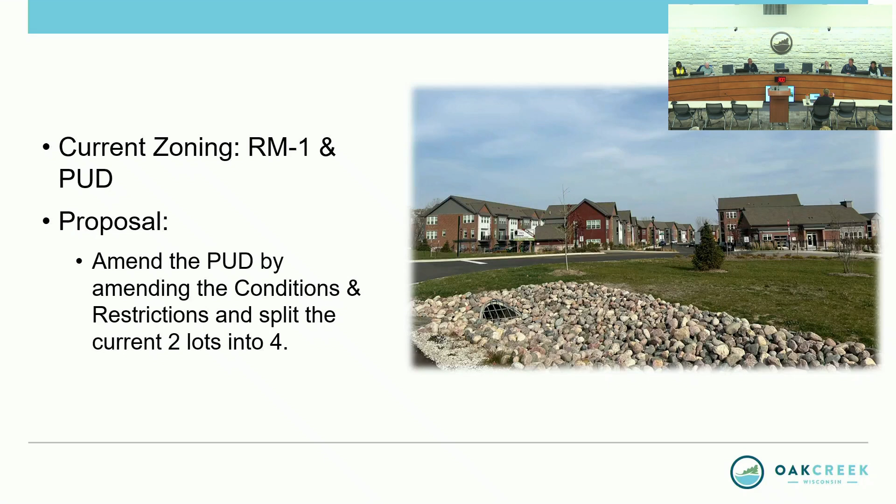What is being requested is, due to financial reasons, the lender is requesting to split the existing parcels at Oaks at 8100. This is how the land was approved to be split when the planned unit development was originally approved in 2021. There are two parcels split by Orchard Way - the parcel on the west highlighted in red, and the parcel on the east highlighted in blue. Lots 1 and 2 were created by CSM number 9404.

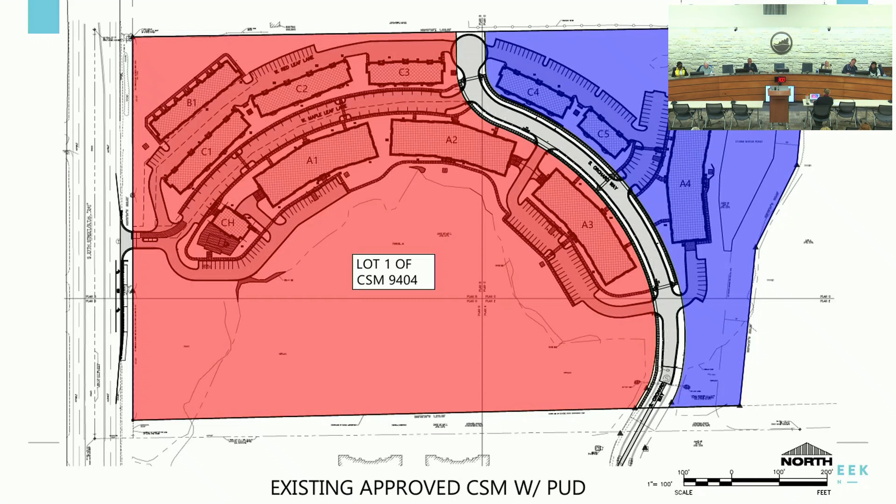The scope of the project is not changing at all. The project is continuing with construction of all the buildings on the site plan. Only two are not completed - A3 has not yet started, they're finishing up A2 right now, and A4 is yet to be constructed. But there's definitely progress on this development, one building at a time.

The proposal is to split what was red into the red and yellow, and what was blue into the blue and green. The request for the planned unit development is simply for one setback number that can't be met due to the lot split, which is circled in red. So the request is to amend the conditions and restrictions with this one number.

That number used to be 5 - it required a 5-foot side yard setback for off-street parking. But the blue and green are proposed to be split right down the middle of one particular parking lot, so that 5-foot setback can't be met because it would become a 0-foot side yard setback in a parking lot. Other than that, nothing's changing except literally this one number.

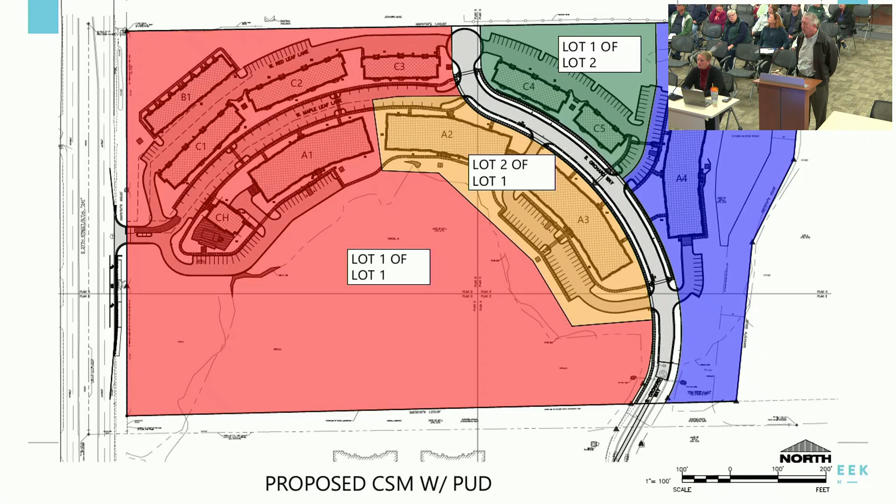You can see the picture here at the bottom, already paved. This is that parking lot where the invisible lot line will go, splitting green on the left and blue on the right. So that parking lot is already paved then. Yeah, it's already there. It's just that building A4 is not built yet.

It's an odd circumstance. And I think that given the reasoning for it, I think that it is not necessarily concerning because it will not impact any other developments nearby, or landscaping buffers or anything like that.

Did the fire department have any problems with that? They did not. That's why they're not here in attendance tonight. They had zero comments on all projects.

Thank you. Thank you. No questions. Questions down there?

I have a question, actually. I'm not sure if it's to you or Christie. Have you ever considered having it on an angle? Maybe that will provide some sort of distance more than zero, if you have it on a 45-degree angle, those parking spots.

We retained Excel Engineering to tackle this project for us, and they worked with staff, and this is what they came up with. I'm just the developer, I'm not a technical person. So I went to the experts and the authorities and asked them to come up with a solution, and this is what they came up with.

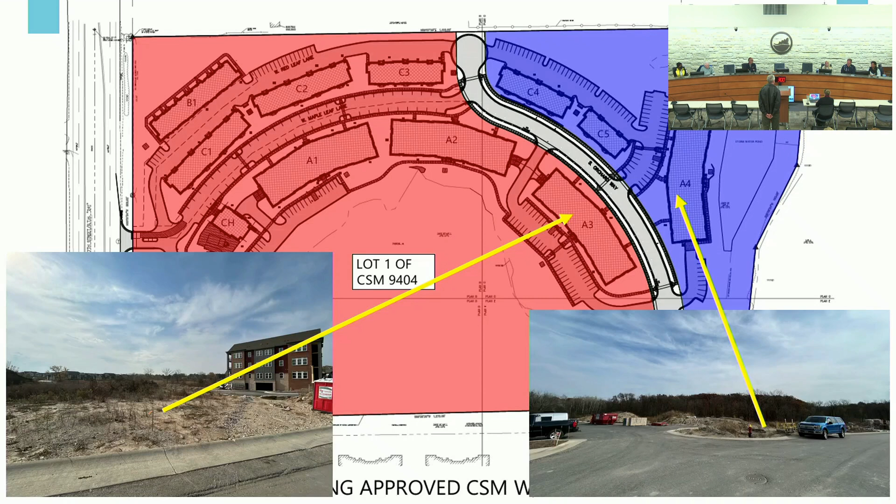And the ownership is the same on all 4 parcels. No questions, thank you. I do have another question. So what if the ownership does change for those 2, and how is that handled? They would just enter into cross-access easement agreements, which would have been the same situation with Lot 1 and Lot 2. Thank you.

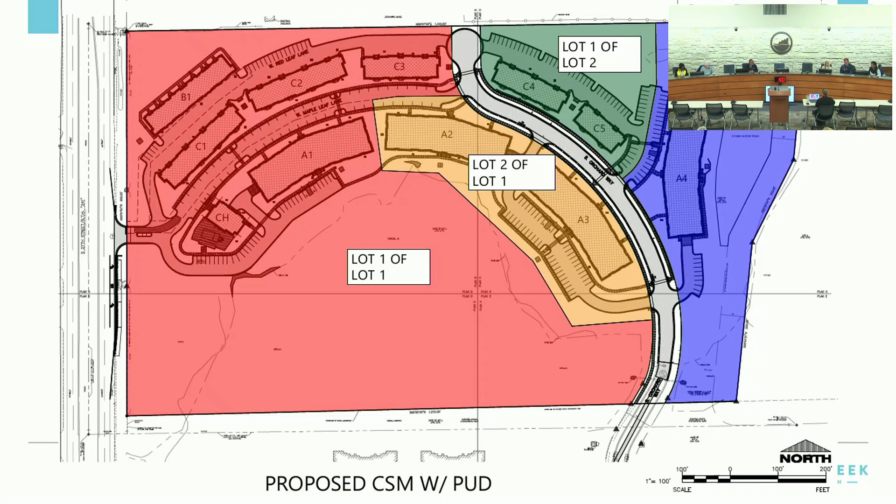Motion? Yeah, motion then, please. Okay. Other question? Someone have a question?

Seifert moves that the Plan Commission recommends to the Common Council that the amended planned unit development and conditions and restrictions affecting the properties at 2676 West Red Oak Lane, 2637, 2668, 2616, 2617, 2548, and 2521 West Maple Leaf Lane, and 8126, 8140, 8159, and 8142 South Orchard Way be approved.

Hannah seconds. Roll call. Hannah, aye. Bouch, aye. Chinsky, aye. Guzekowski, aye. Seifert, aye. Chandler, aye.

Alrighty, thank you, everyone. Go on to 4B, the certified survey map. Review certified survey map submitted by David Decker, Decker Properties, and Devin Winter, Excel Engineering, to divide the Oaks at 8100 multifamily development property located at 2676 West Red Oak Lane.

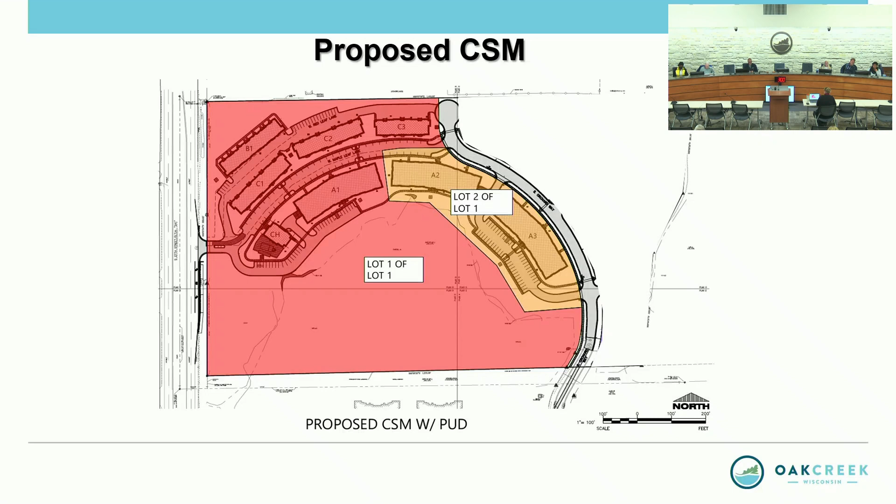Thank you, Alderperson Guzekowski. So this item before you is the actual splitting of Lot 1 as it is today into two parcels, which would become Lot 1 and Lot 2. Both parcels meet the zoning code requirements for size, and this item would go before the Common Council at that same second December meeting.

Pretty straightforward on this one. Questions or comments? No questions, thank you. Questions? Comments down there? No questions. Then we need a motion.

Christine moved that the Plan Commission recommends to the Common Council that the certified survey map submitted by David Decker, Decker Properties, Inc., and David Winter Excel Engineering, Inc., to divide the Oaks at 8100 multifamily development property located at 2676 West Red Oak Lane, 2637, 2668, 2616, 2617, 2548, and 2521 West Maple Leaf Lane, and 8159 South Orchard Way be approved with the following condition: one, that all technical corrections, including but not limited to spelling errors, minor coordinate geometry corrections, and corrections required for compliance with the municipal code and Wisconsin statutes are made prior to recording.

Seifert seconds. Roll call, beginning with Bouch, Steve. Bouch, aye. Kipchinsky, aye. Guzekowski, aye. Seifert, aye. Chandler, aye. Hannah, aye.

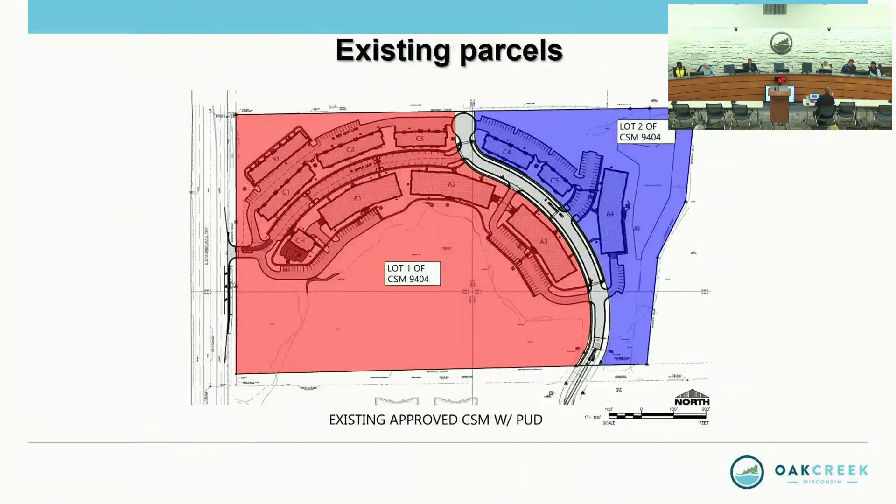Alrighty, C, certified survey map. Review a certified survey map for parcels at Oaks at 8100. Thank you, Alderperson Guzekowski. This item is regarding the eastern lot, which is Lot 2 of CSM number 9404.

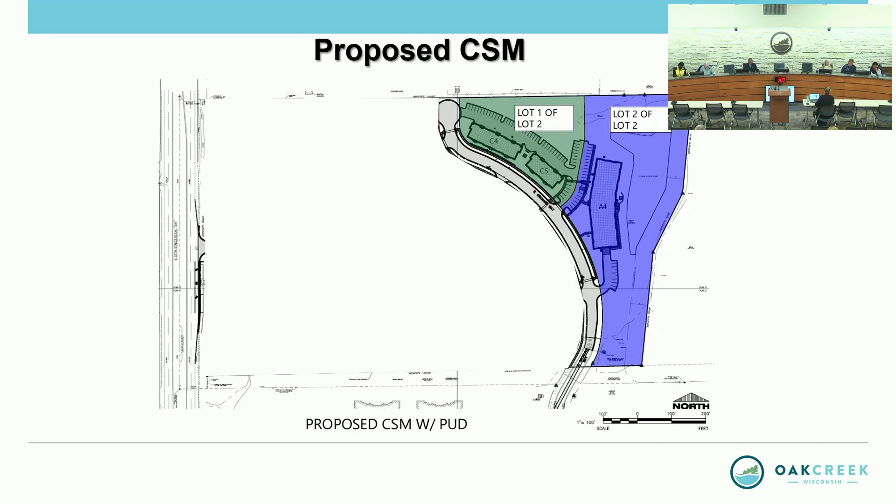The proposal is to split that into Lot 1 and Lot 2. Again, the size of the parcels meets the minimum standards of the PUD and the RM1 zoning district. Staff recommends that the Plan Commission recommend approval to the Common Council. Like this cleans everything up. Comments or questions, anyone? No questions, thank you. No questions.

Then motion, beginning with Ashley. Seifert moves that the Plan Commission recommends to the Common Council that the certified survey map submitted by David Decker Properties Incorporated and Divine Winter Excel Engineering Incorporated to divide the Oaks at 8100 multifamily development property located at 8126, 8140, and 8142 South Orchard Way be approved with the following condition: one, that all technical corrections, including but not limited to spelling errors, minor coordinate geometry corrections, and the corrections required for compliance with the municipal code and Wisconsin statute are made prior to recording.

Hannah seconds. Kipchinsky, aye. Guzekowski, aye. Seifert, aye. Chandler, aye. Hannah, aye. Bouch, aye. Okay.

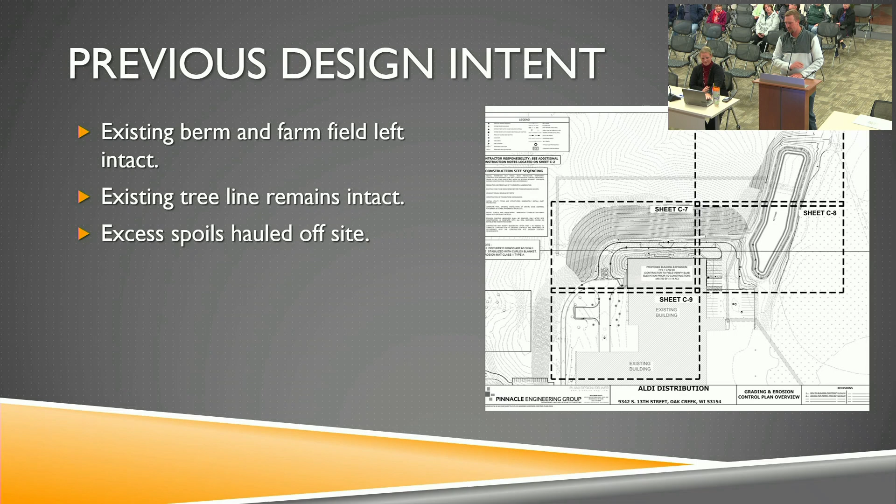Next slide. As Richard said, there's about 100,000 yards of dirt that remains on site, and our user decided to stop taking material. So now we're trying to find a home for that.

Instead of it being an eyesore of a big hill or pile, we're going to shape it into a nice berm that'll be aesthetically pleasing and shade the neighbors, providing a larger line-of-sight disruption. There's a swale proposed along the north property line, and that existing tree line also remains intact.

So with that, I think that's it. Have any questions? I'd be happy to answer those.

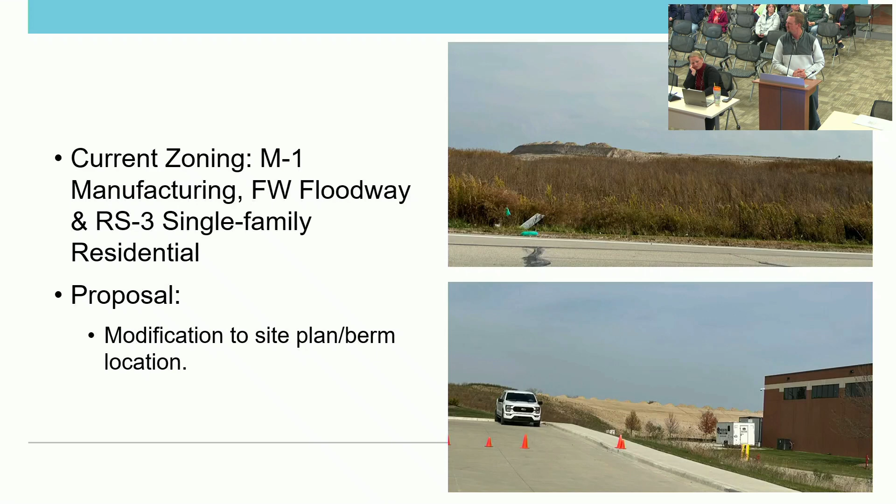I pass by 13th Street a lot and I see a construction entrance site. Is this part of the construction area? Yeah, I believe there's one or two access points off of 13th. It's just for the haul road. Yes, that's all that's out there. It's just temporary, not permanent.

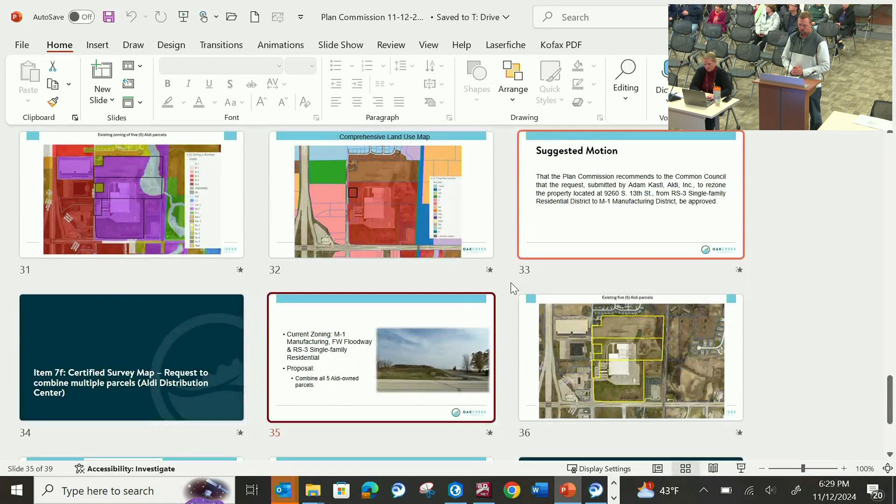Can you go back to the... I think that's the entrance you're used to seeing there, the construction entrance off of 13th. The other one is more on a hill, just across from McDonald's. But anyway, is there a driveway off of Ryan, or do I misunderstand? Or is this off of 13th? Is this where the truck is coming off from, the Access Drive?

There are no new driveways. As part of the previously approved plans, I believe we modified the entry on 13th, and we had a traffic study to back that up, but we're not proposing any new entries with this approval. If you go back - the Access Drive here, where is it going? That's what I call the ring road that goes around the facility itself. Okay, that's it, thank you.

Have you talked to the neighbors north of you about what you plan on doing, just so they're aware of what's going on? They were invited. I know they're here, but they've been kept informed along the way in the process. What happened earlier on in this process, in the build process, is the city never notified the neighbors of the project, so I had to get involved in the middle of summer when it started. So now the neighbors are definitely up to speed.

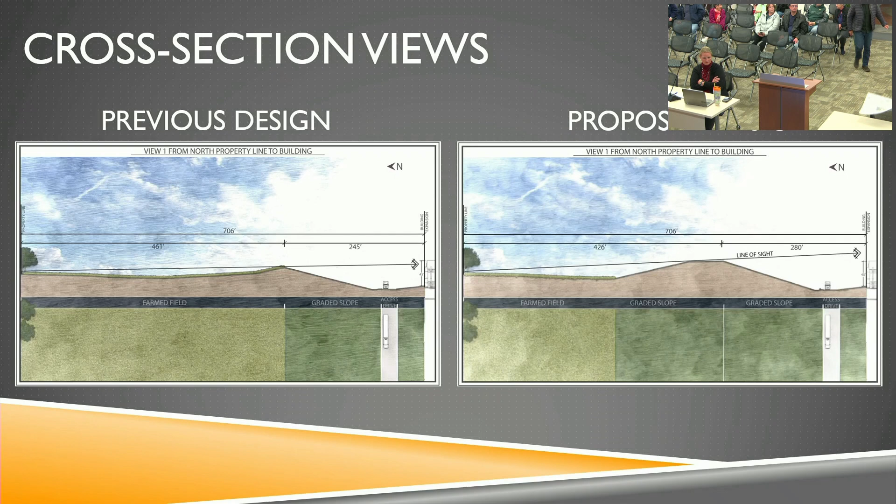My name is Jeff Bloom at 1117 West York Street. My question is regarding the dirt that was initially moved right along the north property line. I don't hear anything about what is going to be done with that now. The existing berm, adding more dirt on top, making that bigger - that's fine. But are they going to move the dirt that they dumped on the north property before anybody knew what was going on? Is that going to be removed? Is there going to be any further work done on that?

Yeah, so the pile of dirt he's referring to is the stockpiled topsoil that we had to strip from the site before we could start reshaping the hill. So we stripped all the topsoil, and that's where we stockpiled it. I think that's what caused a lot of these issues - we probably should have stockpiled it somewhere else. But yes, that stockpiled topsoil will eventually be respread back across the rest of the site, and it will not be there at the end of the project. Any other questions out there?

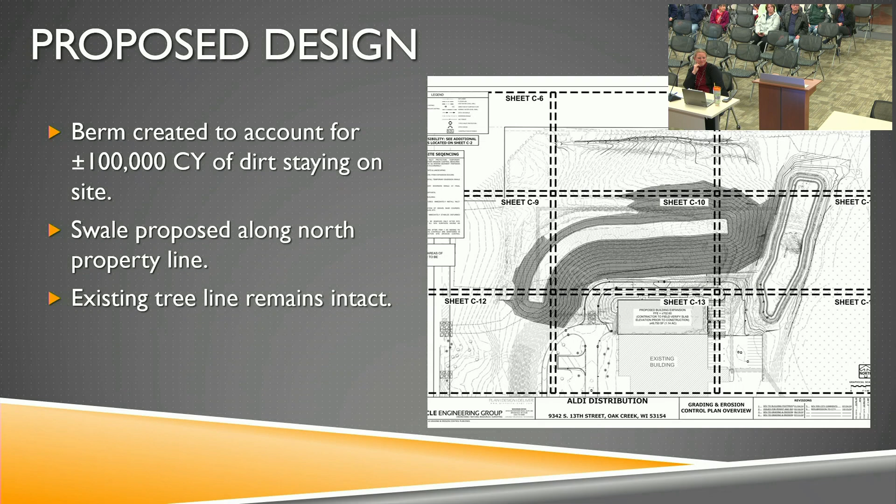Okay. What does everyone think here of the proposed changes?

I have no questions. No more. I do have a question though: will this be permanent, or is this temporary until you find a new customer to remove all this dirt? The new site plan that we submitted would be permanent. Oh, it'll be permanent, okay. And I do have another question for the city: is there a requirement on berm height, a maximum it should be, especially with residents in close proximity?

No, there's not. I mean, if anything, I do believe the residents would be benefiting from this because they don't have to see a warehouse. They'll see the landscaping instead. Yeah, that's the whole point, the reason for the redo and making the berm a little more robust and beefier. This will definitely benefit the neighbors.

And so if it's bigger, that means more water goes towards the residents. But you have this drainage swale now that would catch a lot of this and it will drain into the pond, so it wouldn't make it to the residents. You are correct, we do have the drainage swale, but I do want to correct one thing.

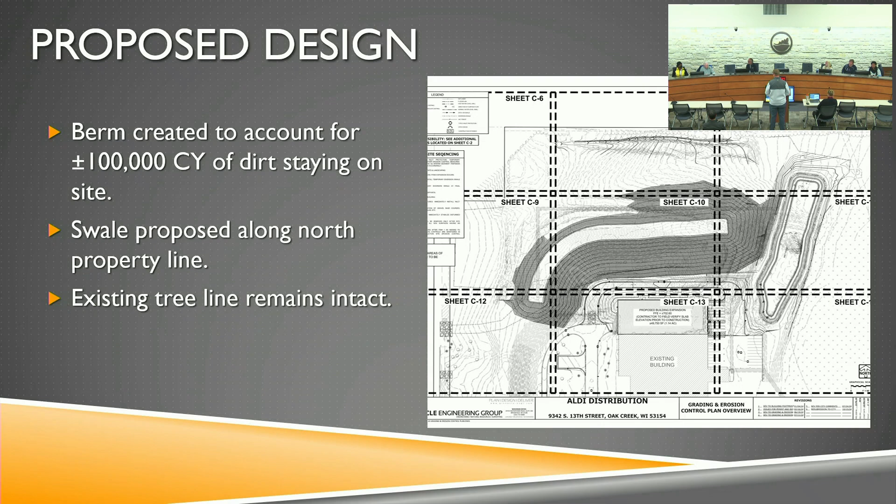More questions? Okay, no questions. Then motion, starting with Fred. Christine moved that the Plan Commission approves the site plan submitted by Adam Kastl, Aldi Inc., and Richard Saki, AM King, for proposed modifications to the Aldi distribution property located at 9342 South 13th Street. Alter second.

Roll call: Guzekowski, aye. Seifert, aye. Chandler, aye. Hannah, aye. Balch, aye. Pshinsky, aye.

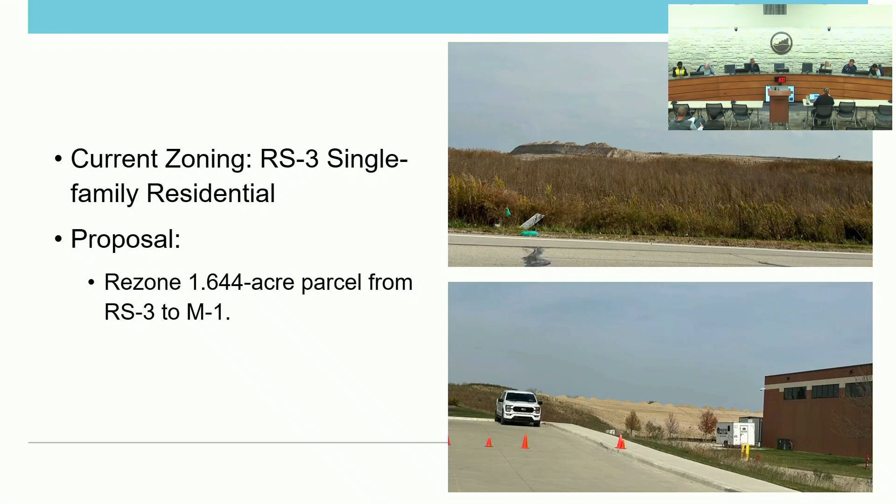Alright, before you we have a request for a site rezone. Rezone request for the property located at 9260 South 13th Street. Thank you, Alderperson Guzekowski. This is simply a cleanup item. There's one parcel that Aldi owns out of their complex of 5 parcels. It's about 1.5 acres in size, and the proposal is to rezone it from single family to manufacturing.

So this is the zoning map. The purple identifies manufacturing, and the blue you can see going through the site is floodway. The 5 parcels that Aldi owns are highlighted in the black boundary, and then there's this one standalone parcel that Aldi purchased in the 90s, and it just was never rezoned. There's actually a pond here today; it's part of their complex.

The next item is to combine these 5 parcels. If you were to combine the 5, you would end up with a split zoned parcel, one parcel zoned manufacturing and single family, which is very poor planning practice. So this is simply an after-the-fact cleanup that should have been done honestly 30 years ago. With that, a public hearing would be held at the second council meeting in December.

Plan commission staff recommends the plan commission recommend common council approval. And it does meet the comprehensive land use map, as this whole complex is identified as manufacturing industrial. So no need to amend the comp plan, just rezone one parcel.

Okay, thank you. Any comments or questions? So is it both green spaces that are being rezoned, or just the one? Let me ask differently: are both green spaces owned by Aldi? If you go back to the prior slide, are both of those owned by Aldi or just the one?

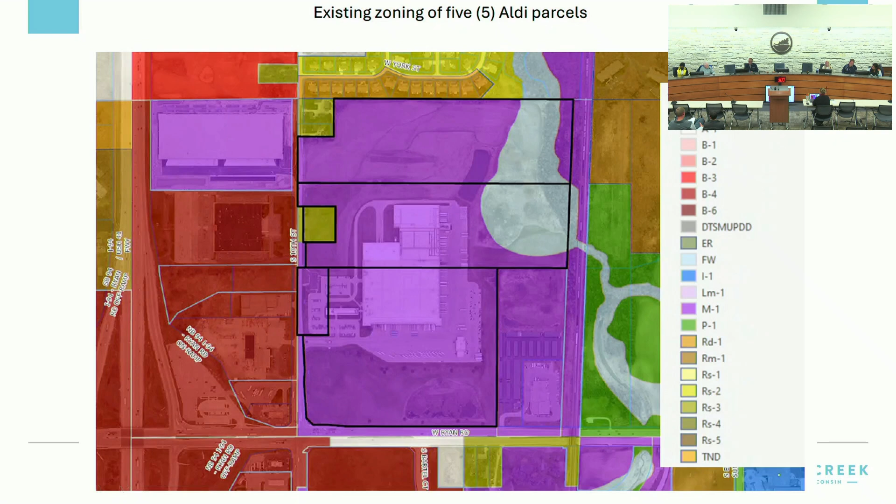No questions. Okay. Then we need a motion on 4E.

Steve Welch, Seifert moves that the Plan Commission recommends to the Common Council that the request submitted by Adam Castle, Aldi Incorporated, to rezone the property located at 9260 South 13th Street from RS-3 Single Family Residential District to M1 Manufacturing District be approved.

Hannah seconds. Roll call. Seifert, aye. Chandler, aye. Hannah, aye. Welch, aye. Chinsky, aye. Guzekowski, aye.

All right, 4F, we're on here. Review a certified survey map. Request to combine multiple parcels, certified survey map.

Thank you, Alderperson Guzekowski. So as a condition of the 2021 building addition, one of the conditions was that the next time there is a modification to the Aldi property, the 5 parcels be combined, just cleaning up some old mess, since over time properties were acquired by Aldi. So the certified survey map before you combines these 5 parcels, highlighted in yellow boundary, to be one consistent parcel.

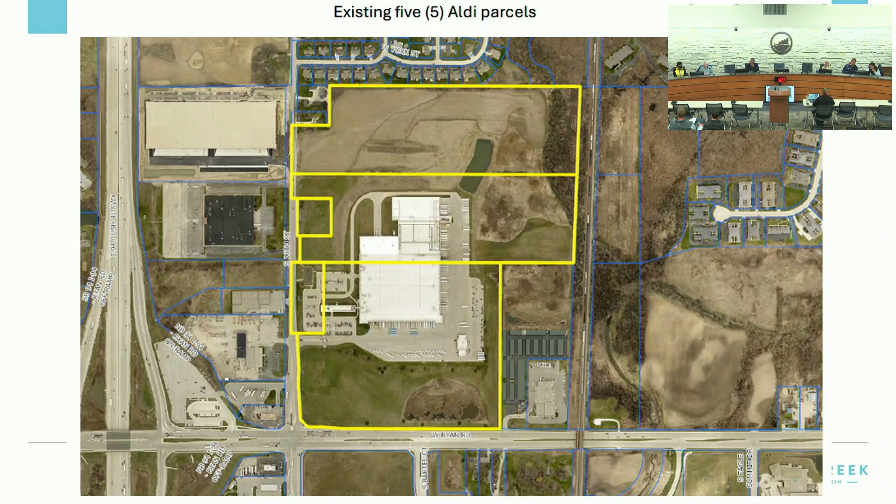There's also some jogging of property lines along 13th Street, so the property lines will be brought interior, as they should not extend into the middle of the road. So the certified survey map ends up dedicating a little bit of land to the right of way. It's very common when you have these jagged property lines to just dedicate it as right of way, not part of the parcel. With that, this would go before the Common Council, the second meeting in December.

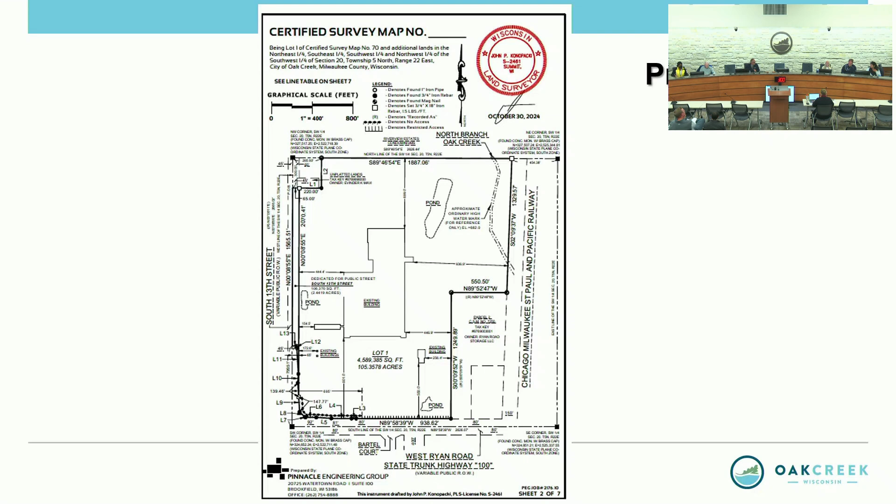Alrighty. Pretty straightforward, looks like we're cleaning up the property and having one map for that. No questions? Nothing? Tony, any questions? No questions. Then a motion.

My turn? All right. Steve Welch, the Plan Commission recommends to the Common Council that the certified survey map submitted by Adam Castle, Aldi Incorporated, and Richard Sakia King, for the combination of multiple parcels at the Aldi distribution facility located at 9150, 9210, 9260, 9342, and 9440 South 13th Street be approved

with the following conditions: that all technical corrections, including but not limited to spelling errors, minor coordinate geometry corrections, and corrections required for compliance with the municipal code and Wisconsin statutes, are made prior to recording. Seifert seconds. Roll call.

Chandler, aye. Hannah, aye. Welch, aye. Chinsky, aye. Guzekowski, aye. Seifert, aye.